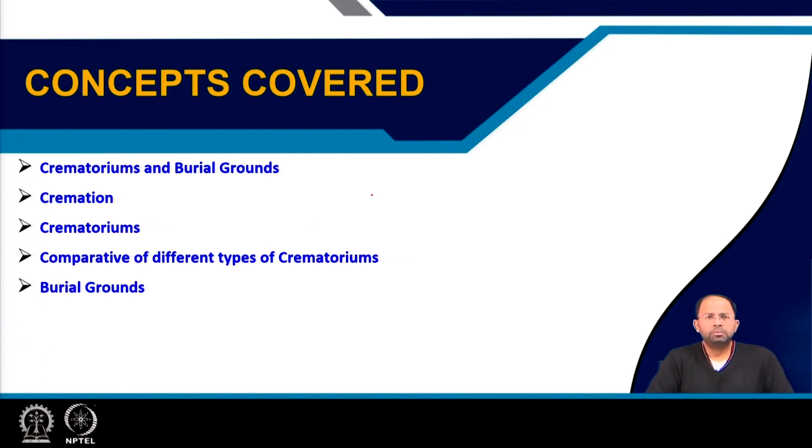Welcome to the last lecture of this course, and this lecture will cover crematoriums and burial grounds. The different concepts that we will cover are crematorium and burial grounds, then cremation, then we will talk about crematoriums, different kinds of crematoriums, and then we will do a comparative analysis of different types of crematoriums, and finally we will also talk about burial grounds.

Now, crematoriums and burial grounds are there in urban areas so that we can safely dispose of human bodies after their death, and usually there are a lot of concerns in regards to disposal of human bodies. There are environmental concerns, ethical concerns, social concerns, economic concerns, religious concerns, and political concerns as well.

So economic concerns are, for example, burial grounds will cost money. In crematoriums, when we cremate people, we have to use wood, or sometimes we can use gas crematoriums or electric crematoriums for that purpose. That costs money as well. And then there are ethical issues, social issues, and religious issues. All these things govern the process of this final journey of people.

Then the religious sentiments of people are obviously very, very important. Different religious groups have got different rituals associated with the final process of cremation or burial, and those have to be respected. And because people are grieving at this point of time, there have to be not only facilities for the actual cremation or actual burial, but we have to provide spaces for other ancillary facilities as well.

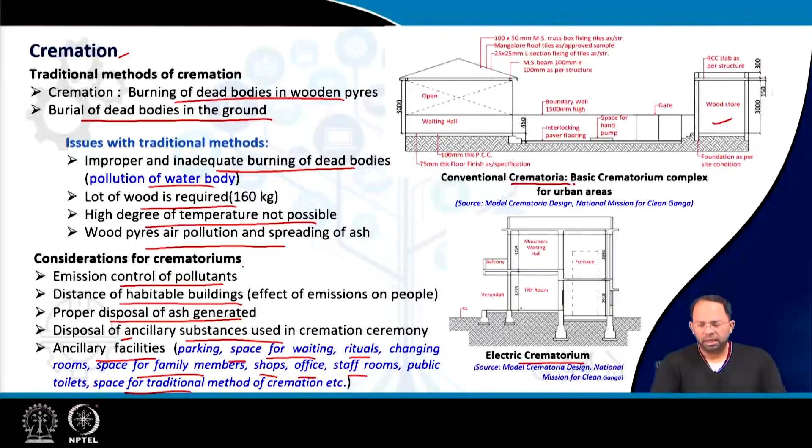There is this furnace, this is a 2-level furnace that is provided, and the body is put inside the furnace, and then after that the rituals happen, and then the body could be put inside the furnace.

So we can have two kinds of crematoriums, electric crematoriums and gas crematoriums, and usually both involve a moving trolley. In the case of electric crematoriums, there is a furnace of 54 kilowatts. Then the gas that is generated after burning needs to be cleaned, and usually we use Venturi scrubbers for that, where the carbon is captured and the gas is washed, and eventually the gas is released via a chimney, which is at least 100 feet high.

And finally, we also have controls for the movement of the trays, control of the blowers, or control of the furnace. So this is the image of the furnace within the crematorium, and the flue gas needs to be cleaned, and once the gas is cleaned, it is released via the stack. So usually there are fans which blow the air, and the gas is captured in bag filters, and finally the smoke is driven using a fan through the stack.

The combustion chamber, also known as a retort chamber, is lined with refractory bricks which can withstand temperature fluctuations to the extent of 1200 degrees centigrade. And usually there is a double chamber cremation furnace. So this has got two chambers, one at the bottom and top, with a cremation bed and secondary air holes so that air could be blown.

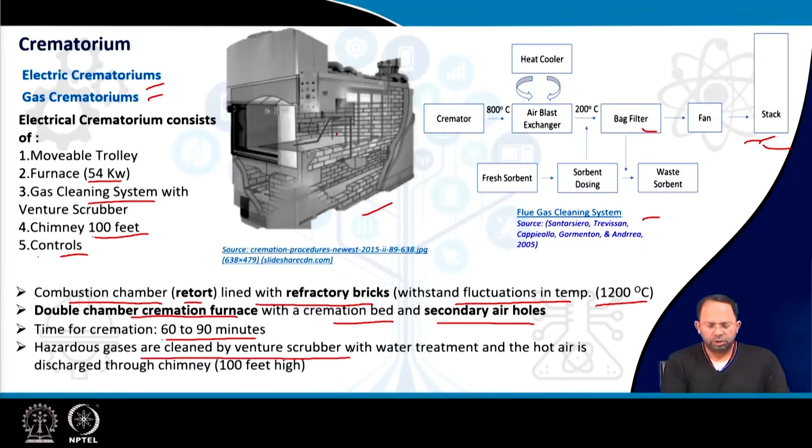And the time of cremation is around 60 to 90 minutes; based on different biological matter, the time varies. And hazardous gases are cleaned by a Venturi scrubber with water treatment, and the hot air is discharged to a chimney, which is 100 feet high.

For an LPG crematorium, more or less everything is the same. We have a movable trolley, cremation furnace, LPG gas combustion system, and then we have Venturi scrubbers, then chimney and controls. So in the case of gas crematoriums, there is a primary and a secondary chamber instead of just a simple furnace.

And the furnace is basically a double chamber furnace similar to the last one, which has a cremation bed and secondary air holes. And the furnace is lined with high quality alumina refractory bricks, fire bricks, insulation bricks, and arch bricks as well.

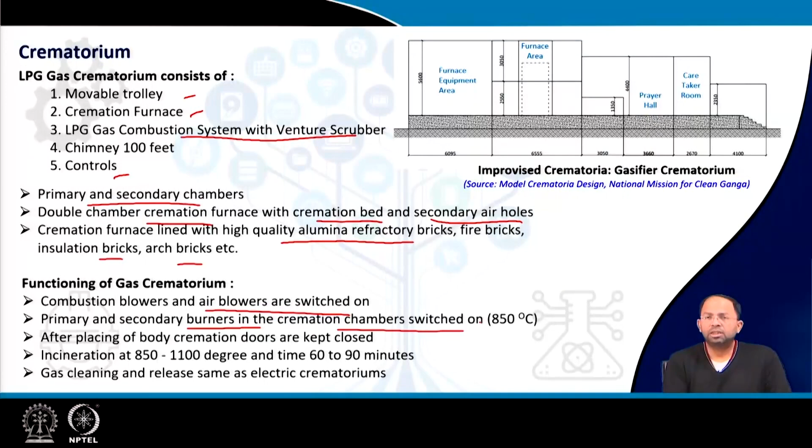How the gas works: the combustion blowers and air blowers are first switched on, which blow air, and primary and secondary burners in the cremation chambers are switched on, which helps to achieve around 850 degrees centigrade, and then the body is placed for cremation.

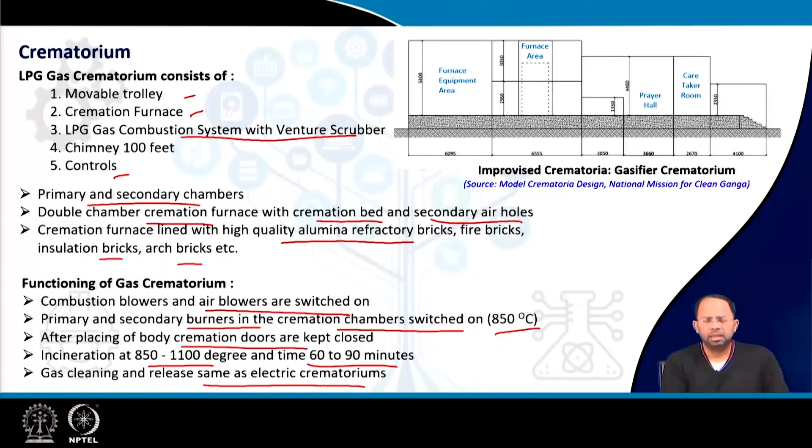Doors are kept closed. The temperature reaches around 850 to 1100 degrees, and it takes around 60 to 90 minutes for the cremation to be completed. Finally, gas cleaning has to be done, and after cleaning it is released, similar to an electric crematorium.

So this chart gives a comparison of the different types of crematoriums. So these are standalone crematoriums or standard crematoriums where normal wood is utilized. So over here you can see the cost of each of these crematoriums. Over on this side you can see some improved designs are being discussed, as well as gas furnace or electric furnace crematoriums are also discussed.

The different kinds of facilities that are required: prayer hall, ritual platform, body washing area, ash storage, officer and caretaker room, all these things are also given. So each requires certain spaces. So overall boundary walls are also given, facilities for toilets, hand wash, sitting areas, these are also given.

So you can go through this particular chart and determine what sort of area is required for a crematorium, and roughly the costs are also given. So this gives you a rough idea about how much money is required to set up this kind of crematoriums as well.

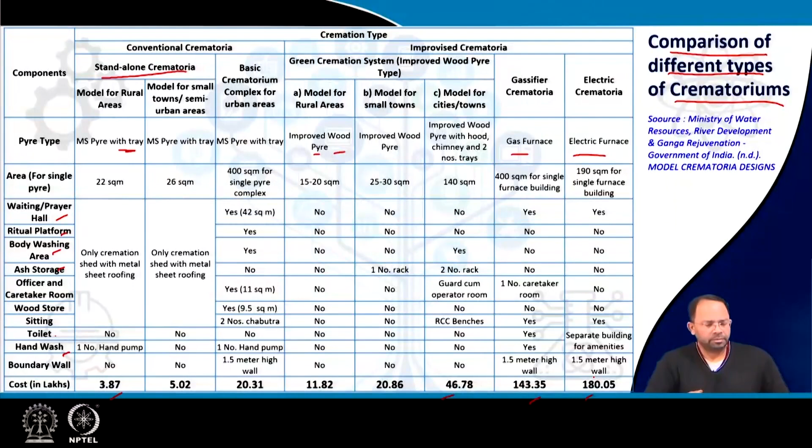So finally, coming to burial grounds, there are certain other considerations for cemeteries in urban areas. First of all, there are several regulatory and compliance obligations for running of cemeteries, and based on not in my backyard reasons, people don't want this kind of facilities to come near their houses. So getting approval from the community is difficult. Existing cemeteries are fine, but for new cemeteries it is really difficult to get permission.

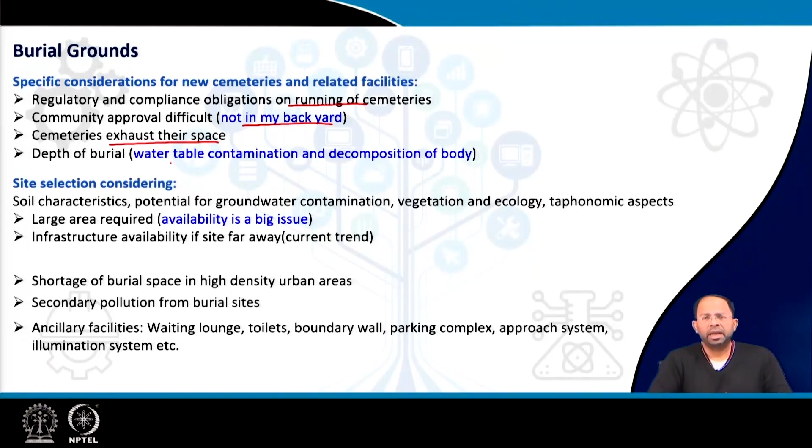Then most of the cemeteries are exhausting their spaces because of the population pressure, and there has to be adequate depth of burial because people are reusing the same spaces for burying. There has to be adequate depth for burial so that there is no water table contamination and the decomposition takes place smoothly.

So site selection for a new cemetery is done considering soil characteristics of that area, potential for groundwater contamination, vegetation and ecology, and taphonomic aspects, which are related to the body's decomposition and bones. Usually a large area is required for a cemetery, which is also a big issue because we don't get this kind of large areas in urban areas.

And then infrastructure availability: in many cities, people are now setting up new cemeteries far away from the main core urban area, and because it's far away, infrastructure availability also becomes an issue. And right now there is a lot of shortage of burial space, and the money charged for burial space is also very high. So it's very difficult for many people to adopt that.

Then there is a lot of secondary pollution from burial sites, and ancillary facilities are also required for this kind of burial sites, such as waiting lounges, toilets, boundary wall, parking complex, approach system, illumination system, and so on.

So overall we can say that in India, at burial sites, each person requires around 15 square feet of area. The price varies from 15,000 to even lakhs of rupees, depending on where you want to bury your near and dear ones. The nearer it is to the core religious prayer area, the more it would cost. So space is difficult to get. These are the issues that are primarily being faced in regards to burial grounds.